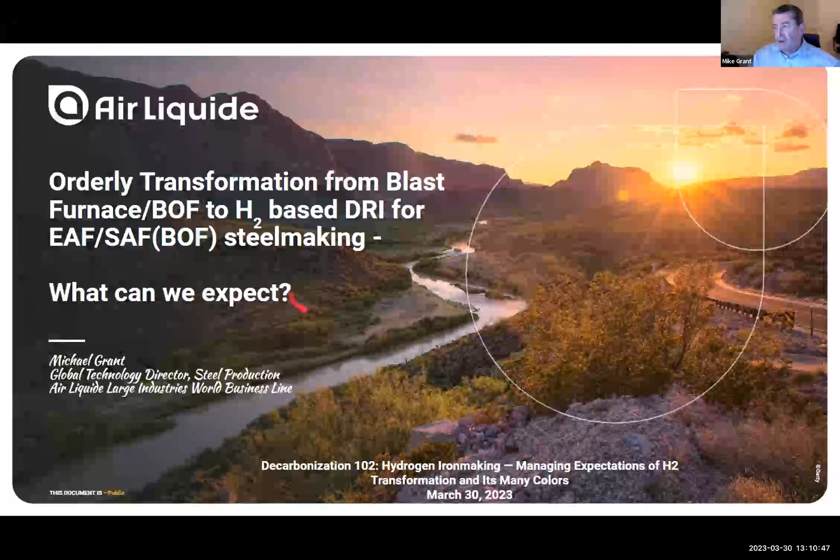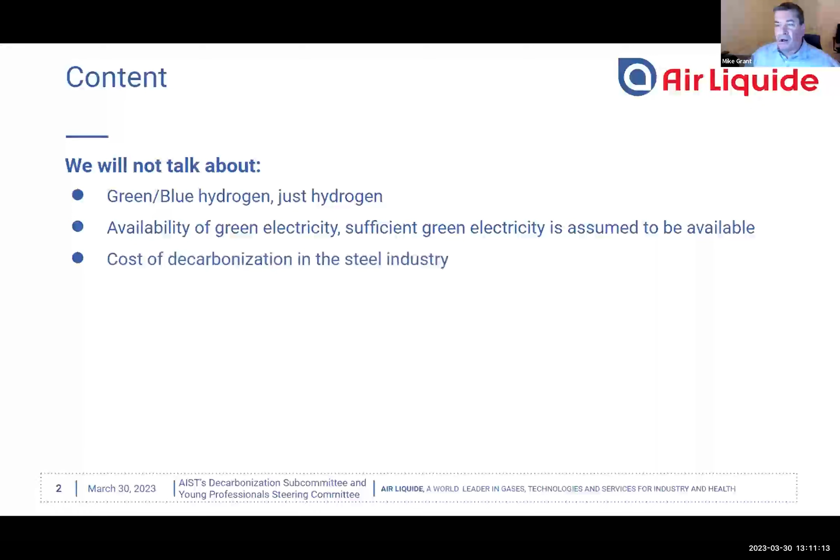Good. Okay, so the title today is Orderly Transformation from Blast Furnace BOF to Hydrogen-based DRI with either electric arc furnace or submerged arc furnace and BOF steelmaking. So what can we expect? Well, I'm going to do something a little bit different. I'm not going to talk about green, blue, or gray hydrogen, just hydrogen. Sufficient green electricity is assumed to be available. We're not going to talk about the cost of decarbonization because we all know this is a very significant endeavor that we need to take.

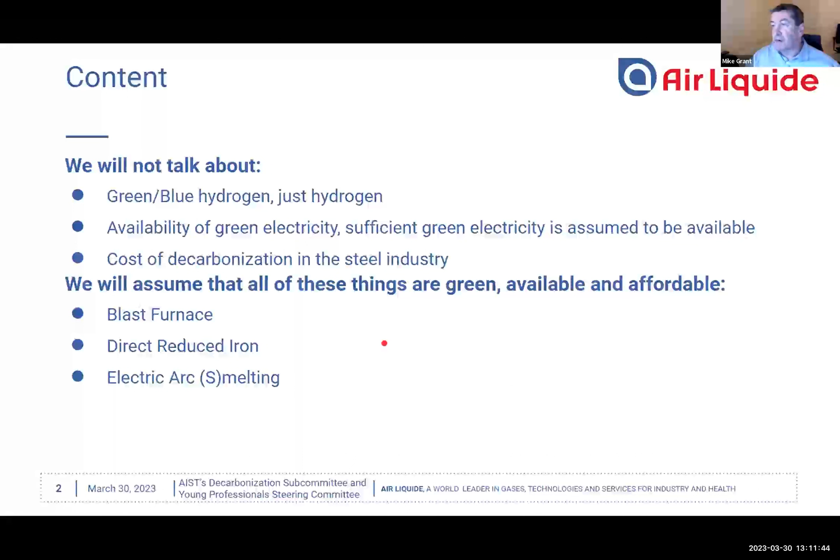Instead, I'm going to assume everything is green, available, affordable, and I'll first talk about the blast furnace, then move on to direct reduced iron, and then finally the use of that direct reduced iron in either electric arc melting or electric arc smelting, as they call it. And this will enable me to focus on other problems besides the ones that I'm avoiding higher up in the list. So let's start with the blast furnace.

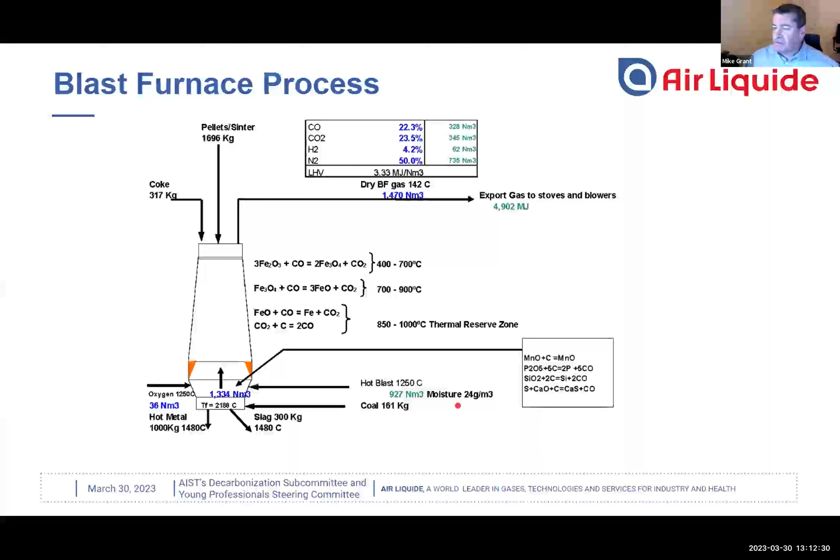This is a classic blast furnace picture. You might find something like this in a textbook. It is very basic. It shows quantities in terms of per ton of iron. And it has the three most important reactions that take place, starting from the charging of the iron ore, Fe2O3, all the way down to the reduction of FeO to iron. I'm not going to say more about this. Those of you who are familiar with the blast furnace have all seen this before. But I'm going to move on to something a little bit more fundamental.

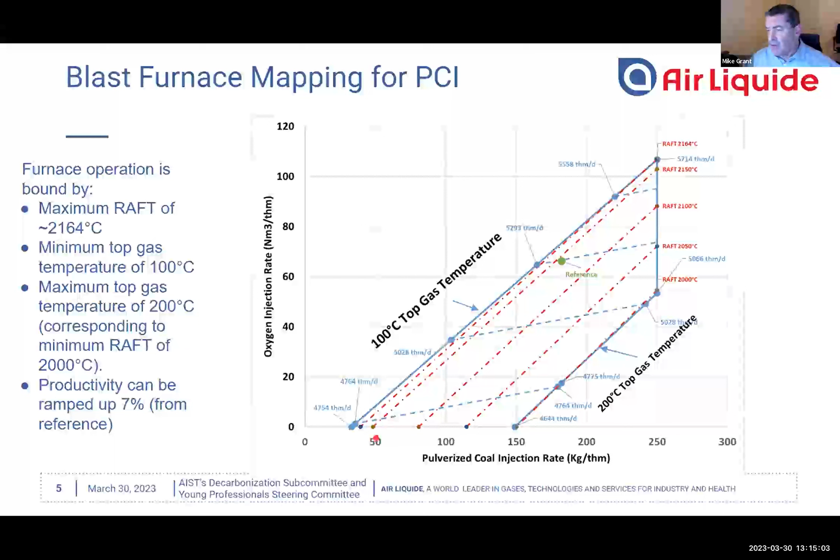We have a minimum top gas temperature limitation, and we have a maximum top gas temperature limitation. These are pretty classic limits that are defined by most operators. This maximum top gas temperature coincides with the minimum flame temperature. So as long as we operate within this range, we can operate the blast furnace fairly smoothly. If we can achieve our maximum coal injection, defined here as 250 kilograms, combining it with oxygen will allow us to increase the productivity up to 7%.

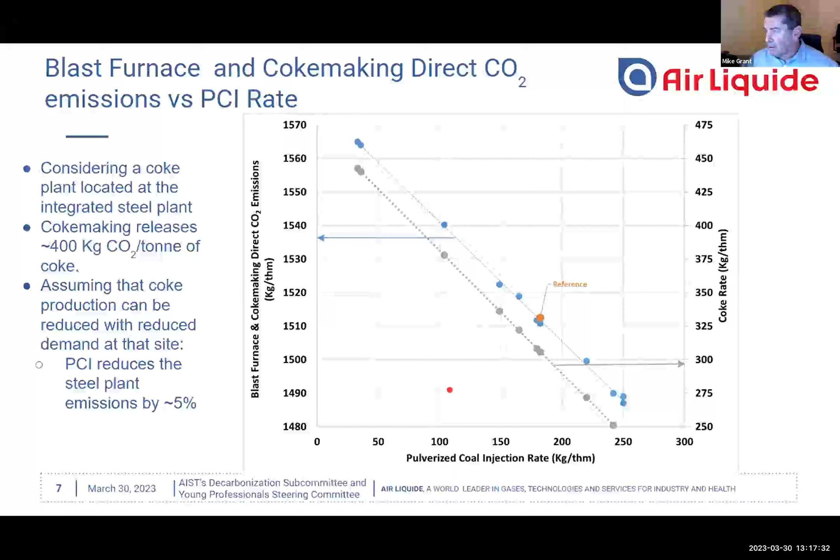So not so much, but nevertheless, it looks a lot better than the previous graph where we showed the CO2 emissions of the blast furnace increasing as we increase coal injection. So overall, we get a net reduction in CO2 emissions. But still, 5% is not very much. And so everybody in the recent years has been talking about hydrogen in the blast furnace. And the reality is we've been injecting hydrogen in the blast furnace for many decades. And this was steam injection, first, I think, documented in the Soviet Union in the 1920s.

And by injecting steam into the tuyeres of the blast furnace, you get a reaction with the hot coke inside the raceway, and this makes hydrogen. And of course, this is very endothermic and requires a coke increase to cover the endothermic energy that is being absorbed. But the hydrogen that was created was found to actually smooth out the operation. So a furnace that's moving or descending erratically, a little bit of hydrogen actually helps smooth it out.

And the reason for this is because the hydrogen is a small molecule. It tends to diffuse more rapidly into the iron ore particles, therefore improving the reduction. And this can decrease the amount of FeO in the primary slag. FeO will leak out of an iron ore particle, touch the hot coke, get reduced, and freeze. And this has a detrimental effect on the permeability and can cause problems with burden descent. So the hydrogen helps relieve that.

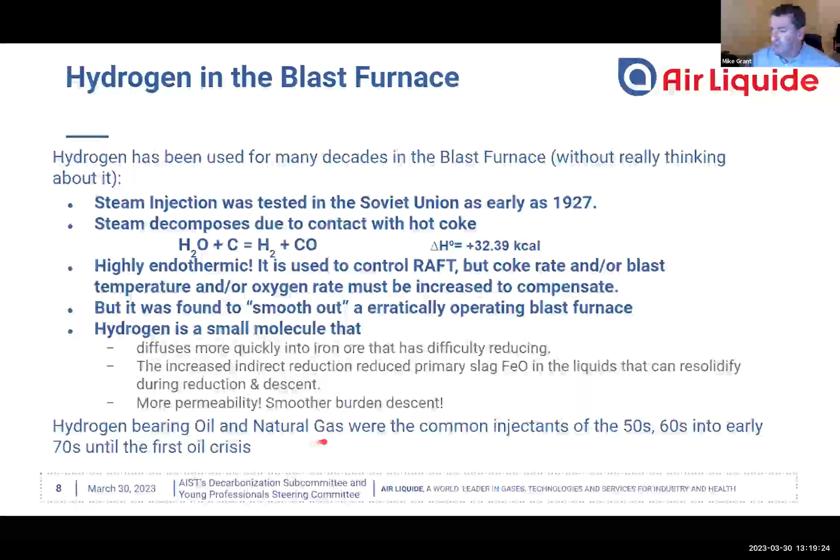Later on in the 50s and 60s, oil and gas were being injected into the blast furnace, and these have a lot of hydrogen in them themselves. And this helped also improve the operation of the blast furnace. Hydrogen has other benefits such as aerodynamic benefits. It can improve the permeability of the furnace. Another limitation is the pressure drop from the tuyeres to the top of the furnace. This is dependent on a permeability represented by the constant K and the density of the gases inside the furnace. We call them bosh gases.

As we put a lot of hydrogen into those bosh gases, this density goes down, which actually lowers the delta P between the tuyeres and the top of the furnace. And so this has, in some cases, allowed for a little bit higher productivity. And so not only do we see the CO2 emissions going down with hydrogen injection, but we also can experience some smoother operation. So what does hydrogen do in the blast furnace?

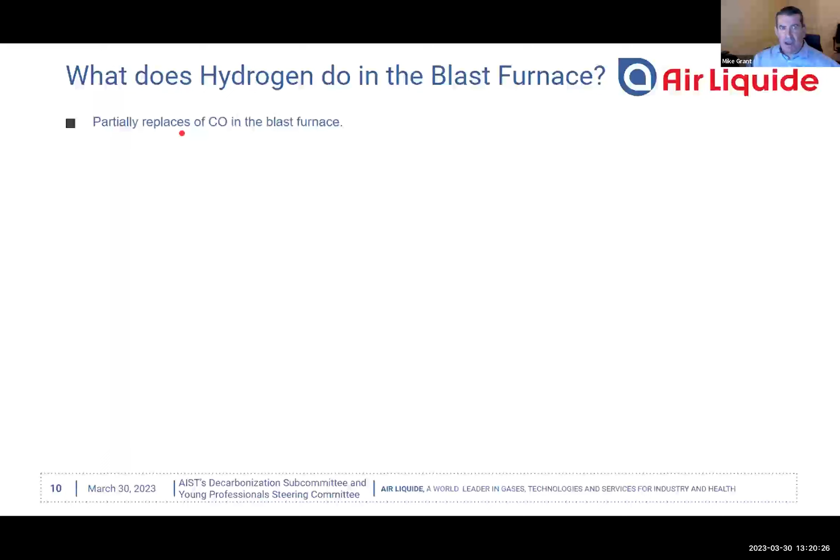Well, you saw in that first diagram I showed you, they had the reduction reactions with CO. Well, hydrogen directly replaces the CO in the reduction. And you can see the three main reduction steps being undertaken with hydrogen. And you'll see that these are the energies required for this hydrogen reduction. Now you notice here that there's a net endothermic effect when we do all of our indirect reduction with hydrogen.

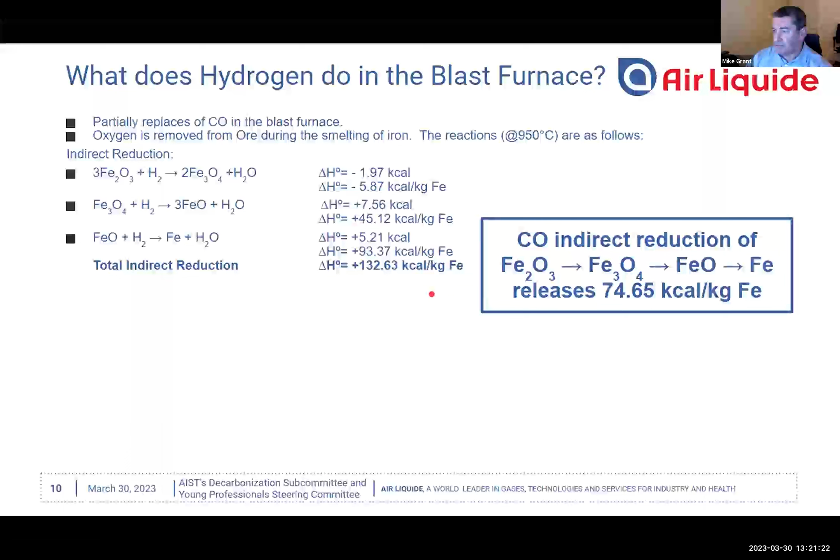If we compare that to CO indirect reduction, CO indirect reduction is actually exothermic, so it contributes energy to the process and therefore helps reduce the total energy requirement of the furnace. Looking at the lower part of the furnace, we start to react water with coke. This is highly endothermic, and the total direct reduction is a very endothermic process. So the net effect of hydrogen reduction in a blast furnace is equivalent to roughly 90 kilograms of extra carbon that needs to be charged to cover the endothermic nature of these reactions.

So this is one of the issues that needs to be dealt with when we use hydrogen in any iron reduction process. If we look at the map of 100% hydrogen injection versus oxygen consumption, we see our limitations get squeezed very quickly. So we're limited by low top temperature and low flame temperature. And as we inject more and more hydrogen, we have to inject a lot more oxygen until we reach this point where we're at our minimum flame and top temperature. And this is our limitation, which is only about 27 kilograms of hydrogen for this particular furnace.

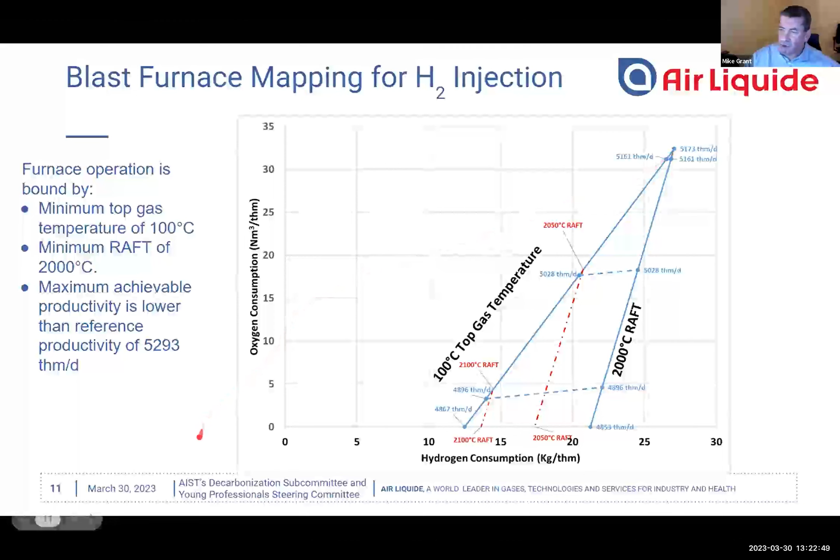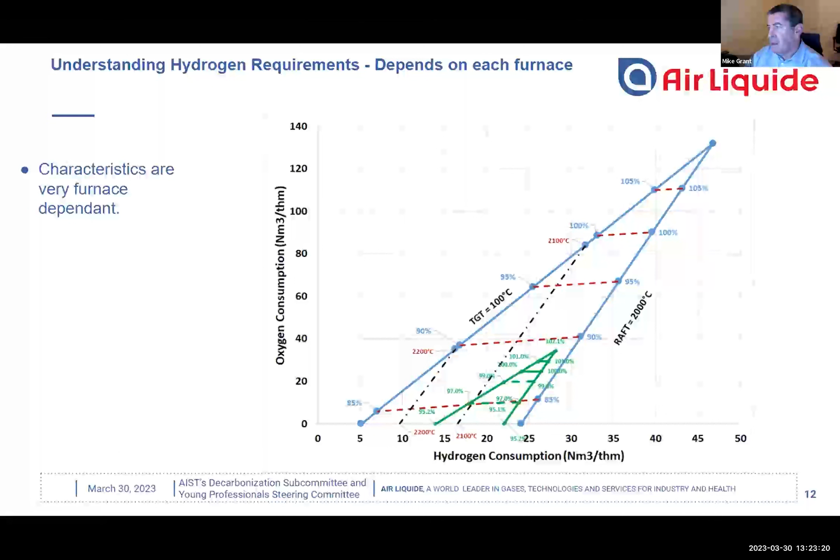So these are the limitations of the furnace. And in fact, in this case, we don't even reach our reference productivity. This effect, of course, is furnace dependent. So this little green map here was the same as the one I just showed you. And a larger one is for calculations I did for another furnace. And this particular furnace can actually accept up to 47 normal cubic meters of hydrogen, which is quite unusual, but it's very furnace dependent. And in this case, this particular furnace would be able to get more benefit out of the hydrogen injection.

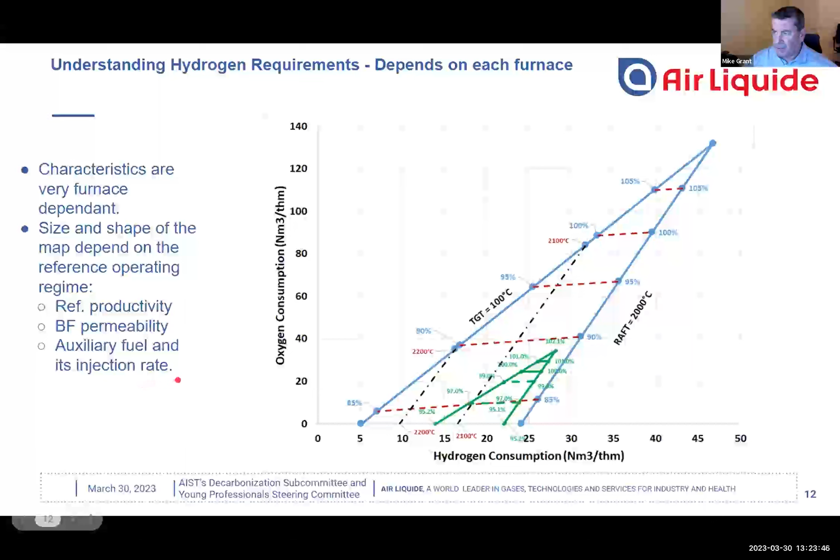It's dependent on many different things. The reference productivity, of course, is very important. If the furnace was already at close to its maximum, the permeability has an effect. And of course, how much auxiliary fuel rate was being injected prior to the hydrogen being introduced. Like the PCI graph, when we inject more hydrogen, we reduce our blast furnace and coke making direct CO2 emissions. Using the same assumptions that the coke plant is located at an integrated steel plant, the same emissions for making coke, and assuming that we can reduce the coke production, we can get a small decrease in CO2 emissions from injecting hydrogen. And this is about 10%.

And it's not very much. The blast furnace emits about 1.5 tons of CO2 per ton of iron that it makes. So if we are able to reduce 10%, that's only about 150 kilograms. And this, of course, is not really going to be acceptable for contributing to energy transition. So in Europe, they're moving away from the blast furnace. But first, let me explain other issues. So for example, we can start with 0 kilograms of hydrogen. We can inject, in this case, up to 19 kilograms of hydrogen and reduce our CO2 emissions by about 10%.

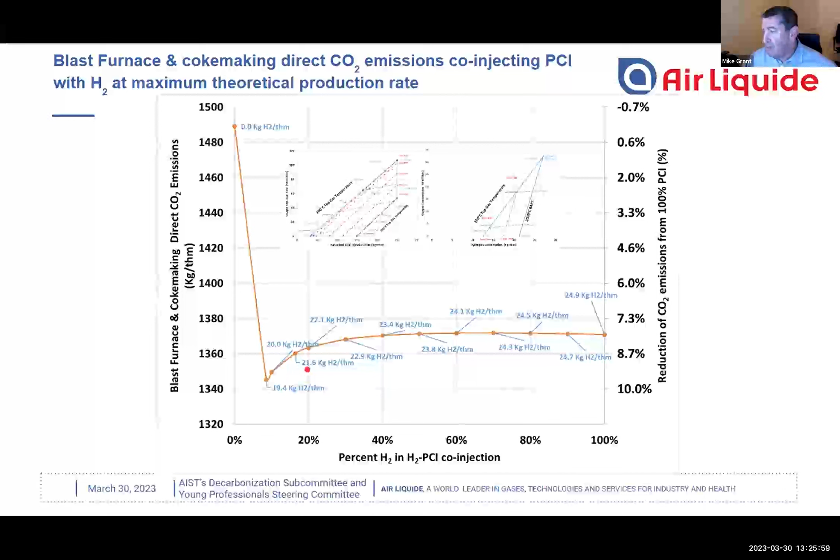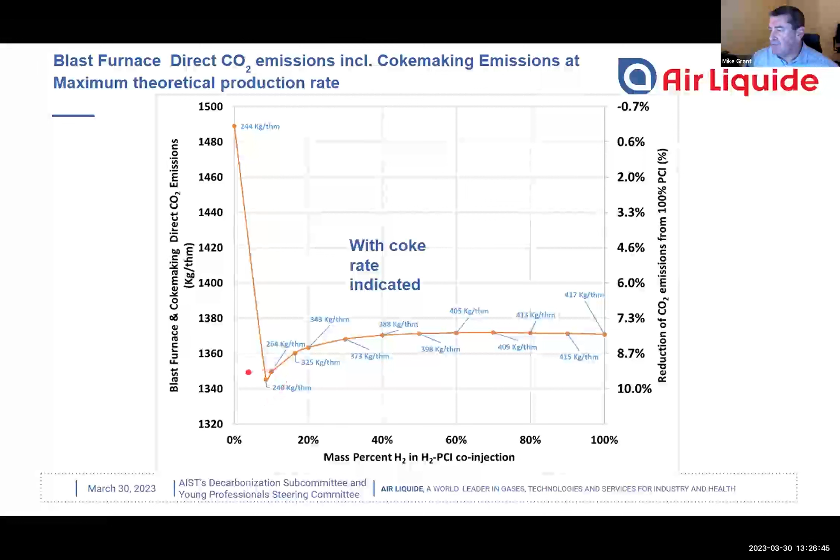Looking at this graph from a coke rate standpoint, you could see, well, the reason we get success in the initial hydrogen injection is because we're able to maintain our coke rate. We're replacing PCI with hydrogen until we get to this point here. And this is very low coke rate. These are theoretical numbers, but it explains the effect. And then at this point, the coke rate needs to be increased again. And when we finally replace all of the PCI, we're back up to about 400 kilograms of coke. And this is why normal operators would stay in this region here, the coke rate inflection point.

However, there is a productivity benefit, and you see if we co-inject PCI with hydrogen, we can actually increase the productivity of the blast furnace beyond the limitations of the original operation with PCI. So if this is the maximum theoretical production rate with PCI, and we mix a little bit of hydrogen in there, we can actually get another 6% increase in productivity on a theoretical basis. The same effect is also true with natural gas, although you need a higher amount of natural gas in order to get this maximum productivity benefit. But nevertheless, there are some benefits to co-injecting hydrogen and/or natural gas with PCI.

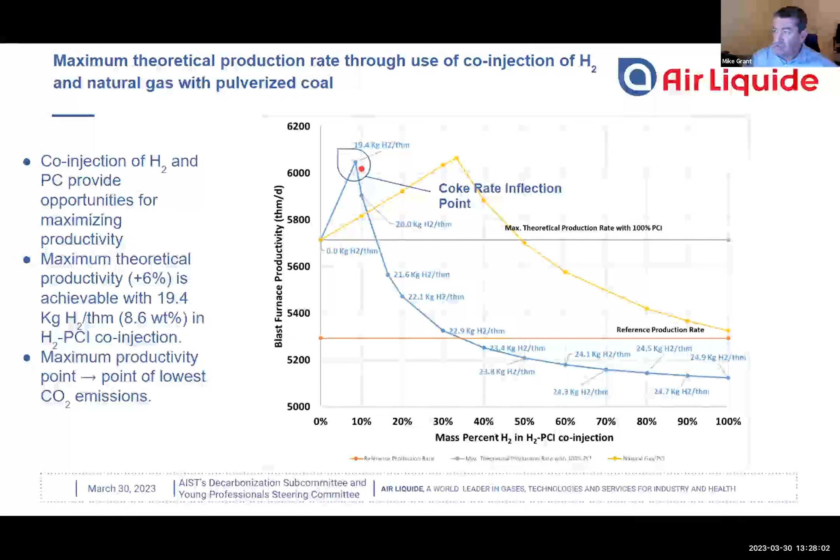This maximum productivity point is also the point of lowest CO2 emissions. So if we can achieve that and get around other limitations, practical limitations that the blast furnace might have, we could actually kill two birds with one stone, reduce our CO2 emissions while increasing the productivity of the blast furnace.

But here in Europe, most of the major steel companies now have announced that they're going to switch to direct reduced iron, because of this limitation that hydrogen has with the blast furnace. 10% is not enough, and so the steel companies are being forced to plan for direct reduced iron making with either submerged arc furnace or electric arc furnace steel making.

And here's an example of some calculations that were done for melting steel to make steel in the electric arc furnace. The reference, of course, is 100% scrap. And you can see this is not a model furnace. It's a rather unimpressive performance, but 480 kilowatt hours per ton is not so uncommon, and 22 normal cubic meters of oxygen.

If we replace 75% of that scrap with DRI and a high carbon DRI, which is desirable, we can maintain our chemical energy by adding a little bit more oxygen, but our power consumption goes up, and it goes up considerably by about 70 kilowatt hours per ton. And this reduces the productivity of the furnace by about 11%. And so this is one of the drawbacks of DRI, but you'll be reducing your CO2 emissions.

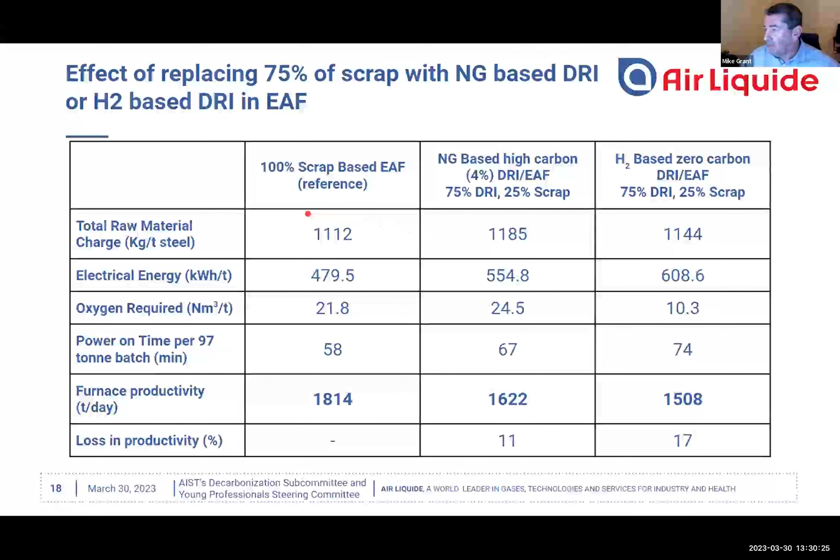If we go further and replace the natural gas reductant with 100% hydrogen, now we're making a DRI that has no carbon in it anymore. And so it's going to be more difficult to melt it in the electric arc furnace. We'll have to back off on our oxygen in order to maintain our yield. And we see this chemical energy is no longer available, so we have to melt with more electrical energy, and we lose another 6% or 7% productivity. So this is one of the issues we're going to have to deal with when we start using electric arc furnaces to melt DRI.

Now, there's two processes or two routes being anticipated here in Europe. One of them is the high carbon DRI being charged into a submerged arc furnace, which is producing a high carbon hot metal. And this high carbon hot metal will be further refined in the BOF, just like they were doing in the first place. To get the carbon in the DRI, of course, you need natural gas. This natural gas deposits carbon in DRI, and you need at least 3.5 weight percent carbon in the hot metal in order to be able to use it in the BOF.

And why do they want to do this? Well, one of the issues with producing low nitrogen steels is we rely on the CO bubbling to purge the nitrogen from the steel. And this is one of the important reasons why it's hoped that the BOF can be kept. The other thing, of course, there's a shortage of DRI grade pellets, which are very high iron content pellets. And this method would enable you to use blast furnace iron ore pellets, which have a higher slag volume. And because the submerged arc furnace is a reducing environment, we don't have the problem with FeO in the slag. And the higher the slag volume, the more FeO you lose, so your yield goes down.

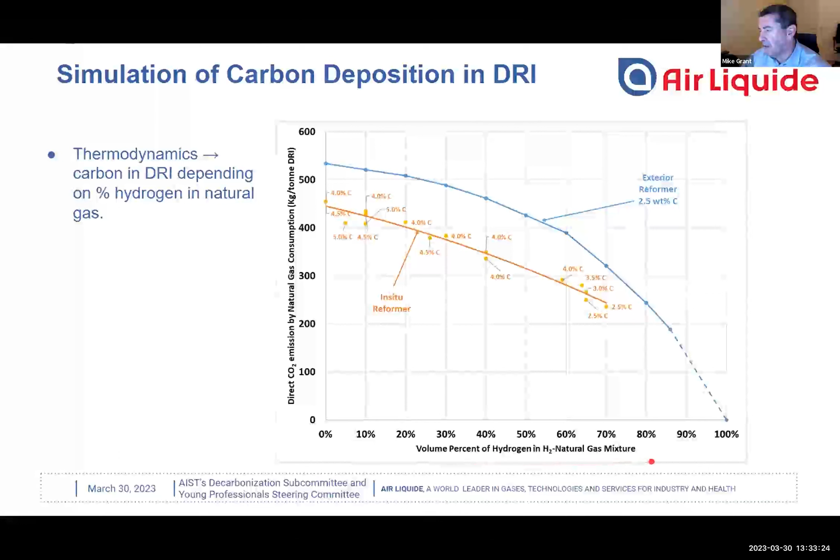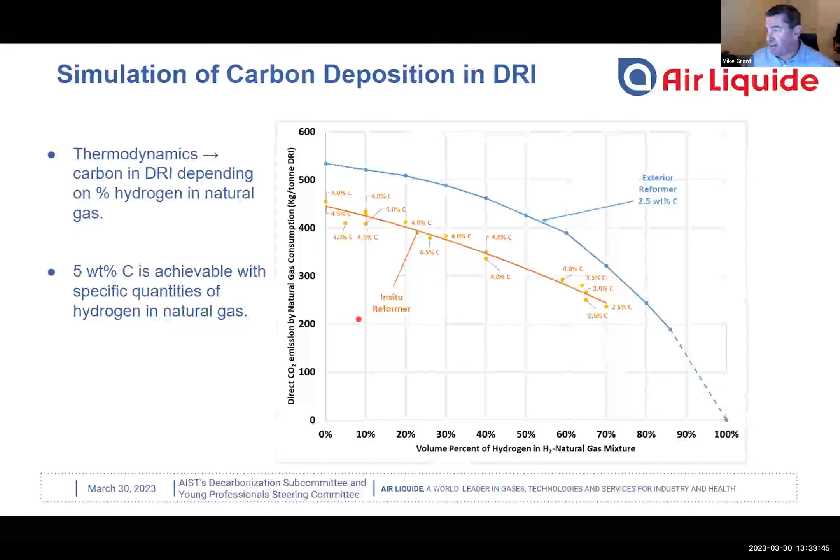Now, I did a little thermodynamic simulation of carbon deposition in the pellets during DRI making. And you can see that we can put carbon in the DRI even if we start adding hydrogen in the mixture with the natural gas. And theoretically, at least, and it's been published also, you can get up to 5% carbon in the DRI, which is good. That's chemical energy we can use in the steelmaking process. And so this is quite achievable, thermodynamically at least, and evidently practically. And so we can make a hot metal if we want to.

However, I went back too fast. However, with DRI, it's impractical to reduce all of the iron units to metallic iron. Typical merchant DRI is about 94% metallization, which means 94% of the iron content in the DRI is metallized. This means about 7.6 or 8% FeO is in the DRI.

And so when we produce a high carbon DRI and we melt that high carbon DRI, this FeO is going to attack the carbon first and use up quite a bit of the carbon. So if we manage to produce a 5% carbon DRI pellet and we melt that pellet, we're only going to produce somewhere around 3.5 to 3.7% carbon in the hot metal, which doesn't give us a lot of room for use in the BOF.

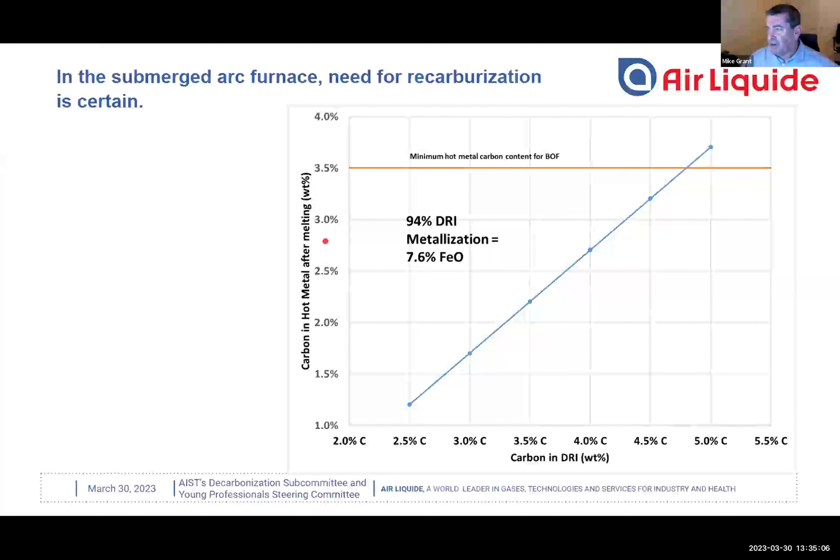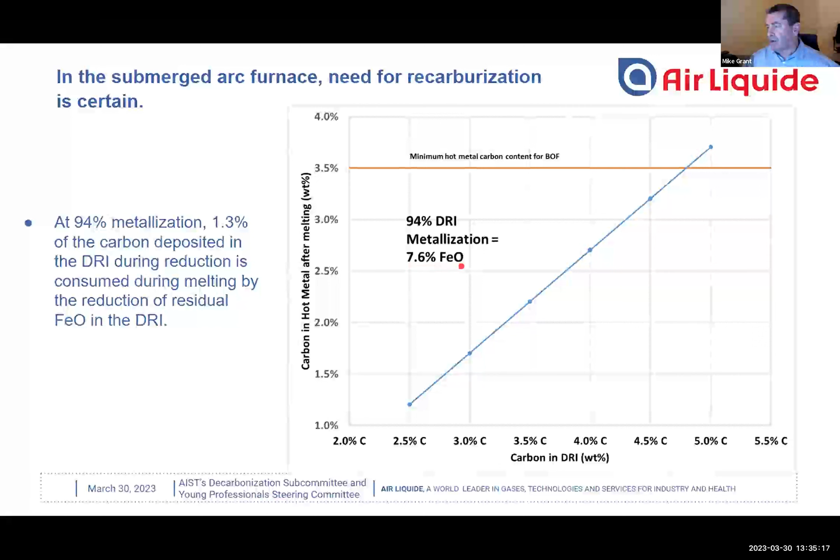So evidently, whether it's a high carbon DRI or a low carbon DRI, we're going to need to get carbon into the process. We're going to lose about 1.3% of the carbon that was deposited in the DRI just through reduction of the residual FeO that's there. What does this mean if we're using it in a BOF?

Well, let's compare with classic hot metal with 4.5% carbon, 0.6% silicon. And let's say we can melt 25% scrap and 75% hot metal. Pretty good ratio. Sometimes we can go down to 70% hot metal. It depends on the silicon content in the hot metal.

Now, when we melt DRI in a submerged arc furnace, we're going to see very little silicon, experts tell me. This silicon is chemical energy from the oxidation reaction. Just from this loss of silicon, it's going to limit how much scrap we can use. In fact, we'll have to go from 25% scrap down to 13% scrap. And this problem gets worse as the carbon content in the hot metal decreases.

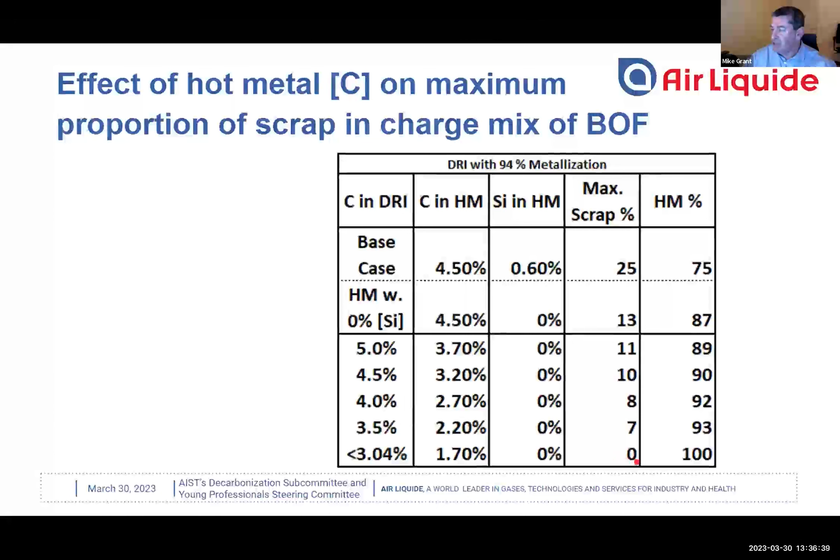So 4.5% carbon in the DRI gives us only 3.2% carbon in the hot metal. Without silicon, this brings our scrap ratio down to 10%. And finally, at 3% carbon in the DRI, we will not have enough chemical energy remaining to melt any scrap. And increasing the scrap ratio is one of the key strategies for reducing CO2 emissions. So we've got a problem here, and of course it all boils down to how we get this carbon in the hot metal.

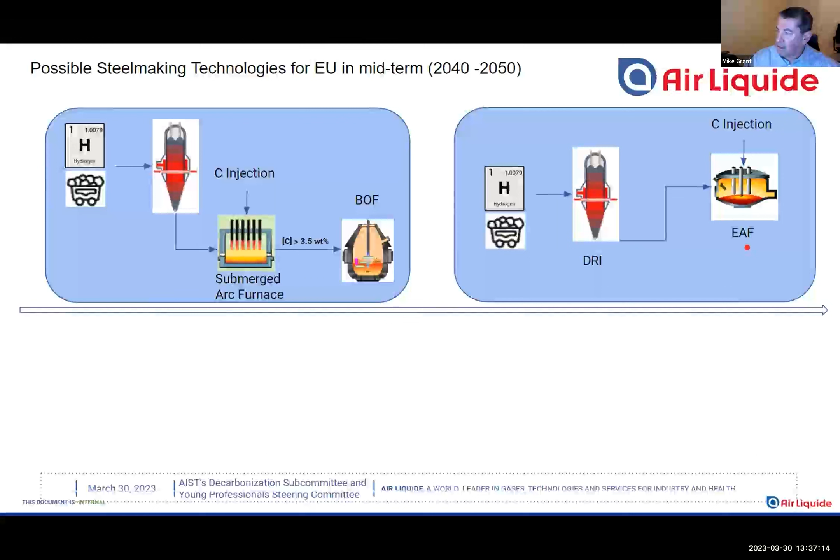So in the future, of course, we want to change this to hydrogen. This is going to produce a DRI with little or no carbon. We'll need carbon injection in both the submerged arc furnace and the electric arc furnace. And so the reducing environment, of course, will require carbon injection. We need to put that directly in the metal, which means it's got to go through the slag and dissolve quickly in the hot metal. So we want the carbon in the hot metal.

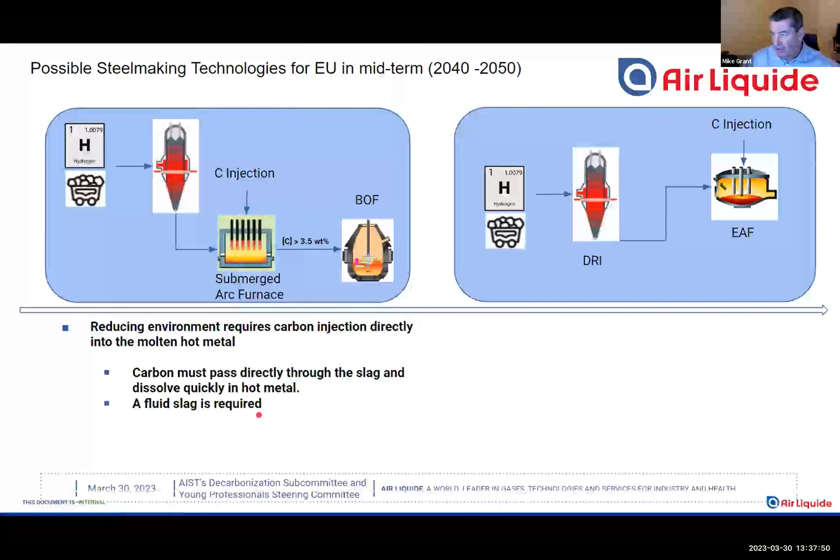This means we need a fluid slag. If we have a blast furnace type slag, this shouldn't be a problem. Blast furnace type slags are designed to be rather fluid, so you can get it out of the tap hole. And so we need to be able to inject the carbon through the slag and into the hot metal. Efficient carbon injection is going to be, in my opinion, one of the key technologies. It sounds simple, but it's going to be one of the key technologies that makes this concept work well.

If we look at the classical electric arc furnace process, traditional carbon injection is used to control the FeO content in the slag, because we're in an oxidizing environment. We're oxidizing quite a bit of our iron units. It's making FeO, which is going into the slag. We've got to recuperate some of that FeO. We do that with carbon injection.

And if we treat the slag correctly, we get slag foaming too, which is a thermal benefit. It reduces yield loss and prevents over-oxidation, so we don't damage our refractories with excessive FeO in the slag. However, conventional carbon injection systems in today's EAFs are around 50% efficient, which means you lose about half of it into the fourth hole, into the exhaust system, where it travels down into the dropout box and smolders and makes CO2 with no benefit whatsoever.

So just a few things to think about. I'm just giving you my final remarks. For the blast furnace, hydrogen injection has limited benefits, unfortunately. The blast furnace itself is such an efficient process. It won't benefit much from hydrogen injection when we're looking at CO2 reduction. About 10% is what we can expect if we're counting the emissions from coke making. And this is the reason why in Europe, almost all the major steel companies are looking to retire their blast furnaces when it's economical to do so.

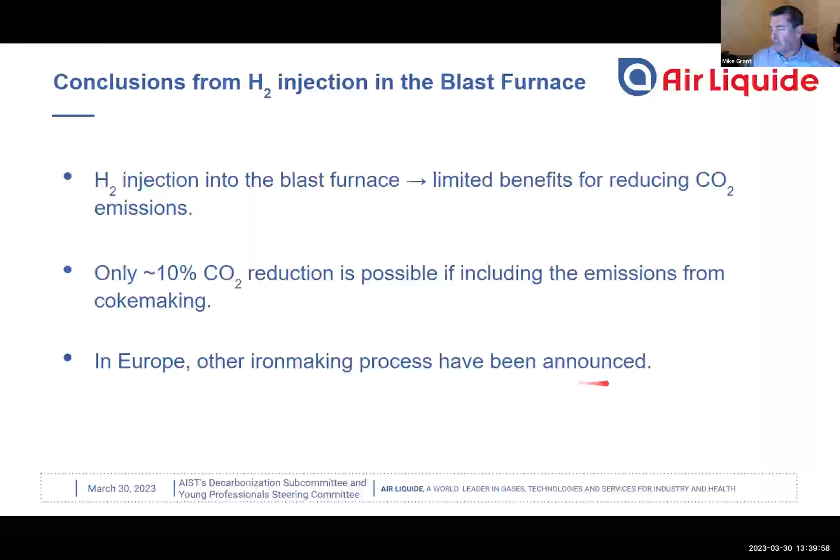Looking at steelmaking, the injection of carbon into the metal bath is going to be critical. We need to do it much more efficiently than we do today. We need to be able to produce a hot metal suitable for the BOF. And this can only be done with carbon injection. And the traditional EAF needs also to be able to use low carbon DRI. And so carbon needs to be efficiently added. We have to compensate for little or no silicon dissolved in the hot metal if we're using a submerged arc furnace. And again, carbon efficiency is going to be the key to saving or making this much better.

So I think this is the challenge for the future. It sounds like a small thing, but it's actually going to be, I think, one of the key developments that enables all of these steelmaking routes to be successful in a low carbon world.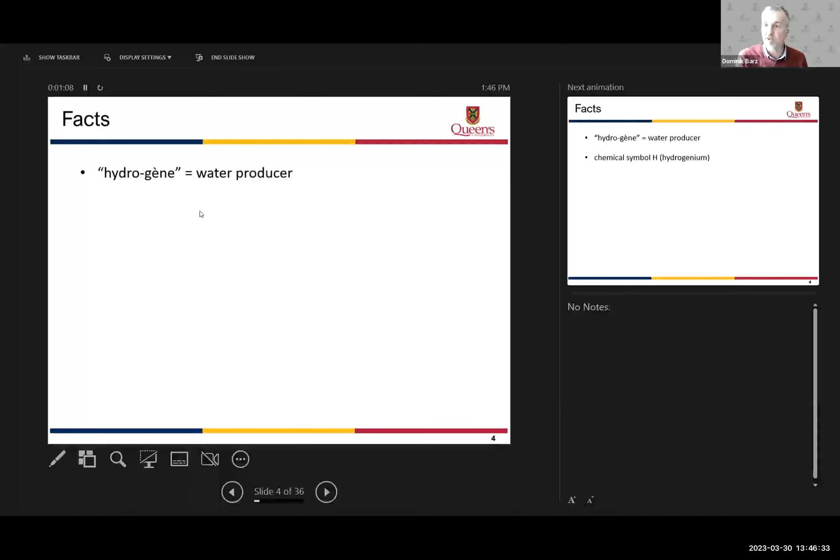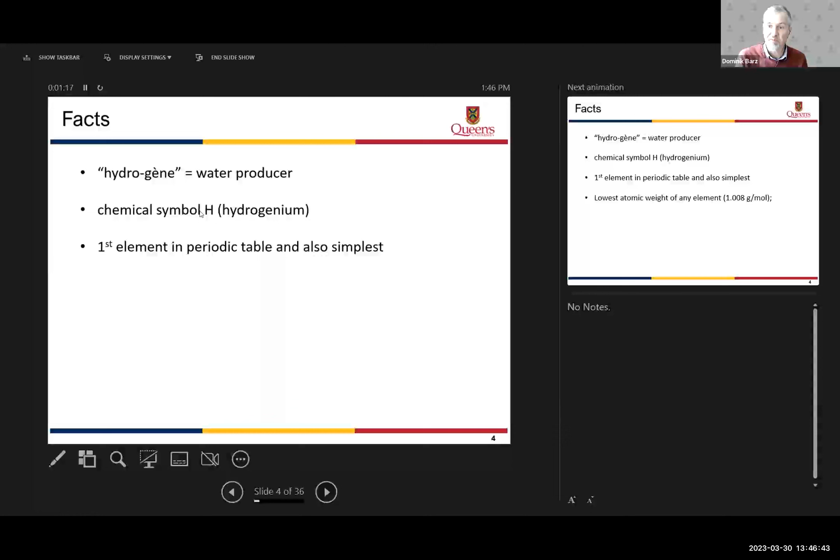Hydrogen comes from hydrogène, which is French for a water producer, because water is made out of hydrogen. Chemical symbol is H, hydrogenium. It's the first element in the periodic table because it's also the simplest one and the lightest. So it has the lowest atomic weight. It's around 1 gram per mole, which is the molar mass.

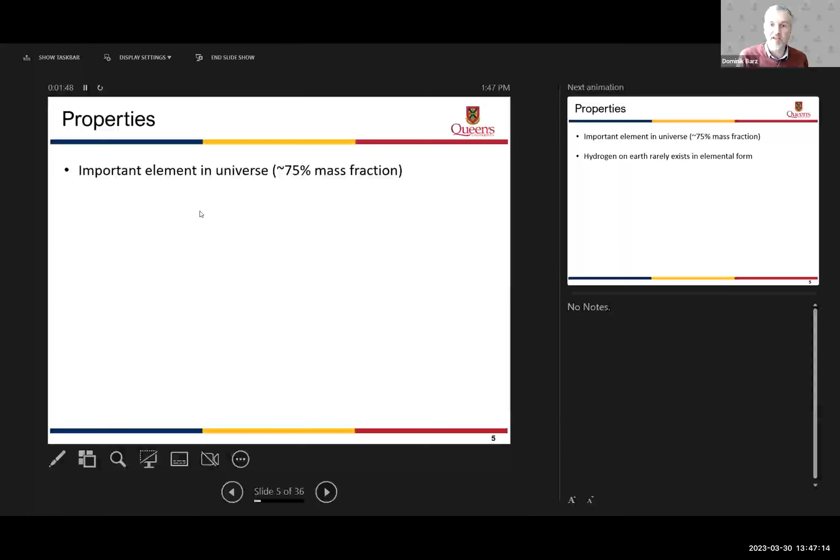It consists of a charged nucleus, which we usually call a proton, and a negatively charged electron. And we have it in forms of isotopes, and then it contains small neutrons. It's the most important element in the universe, and it's estimated that 75% of the universe consists of hydrogen in one form or another. But hydrogen on Earth we rarely find in the elemental form. We always find it as a compound of another molecule. So on Earth, the largest proportion comes in the form of water.

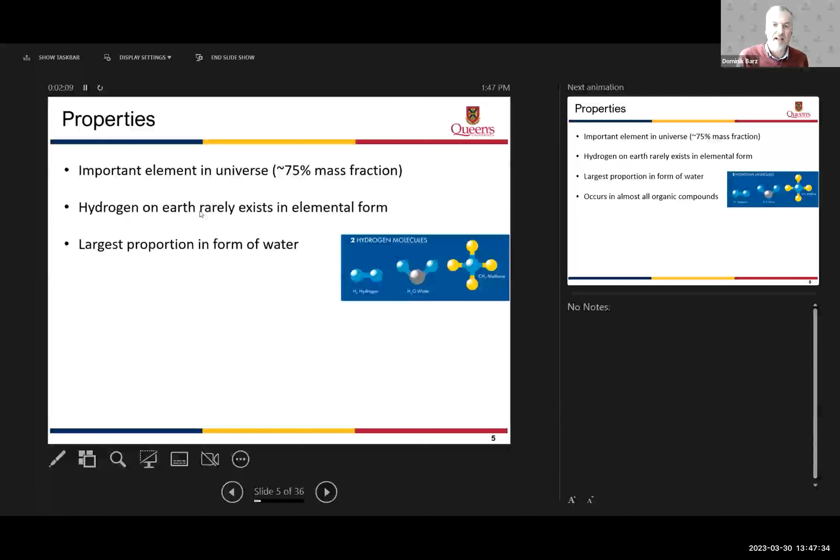And almost all organic compounds also have hydrogen. And fossil fuels, so hydrocarbons, are primarily made of hydrogen. And the higher the hydrogen to C ratio of hydrocarbons, the lower its greenhouse gas emissions during combustion. That's what we are interested in.

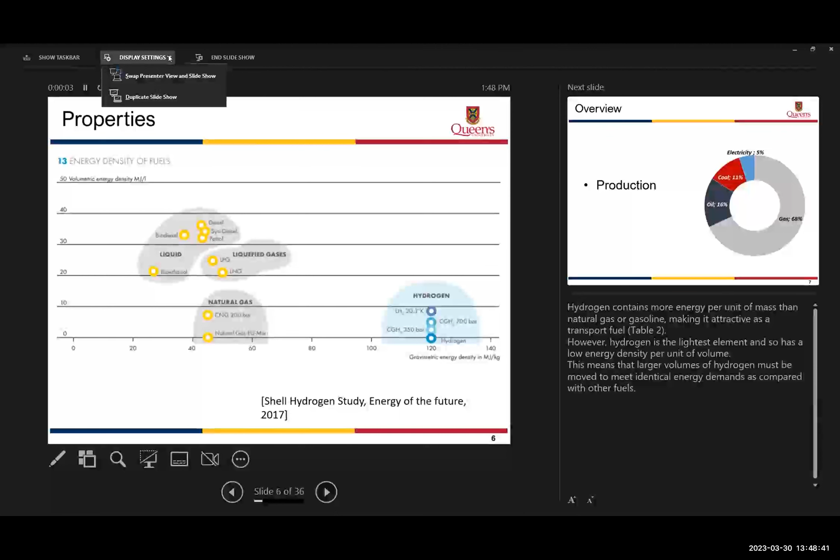Apologies, Dr. Barz, for interrupting. Would you please ensure you're showing the presentation view? We see your next slide in notes as well. Oh, thank you very much. No one told me. So how about now? Wonderful, thank you. I'm sorry for that. No, hang on. I have to change it once more because now my notes are gone. So what do you see now? We see your notes still. Okay, hang on. How about now? Perfect. Excellent. Good. Made it. Thanks, and sorry for that. All good. Thank you.

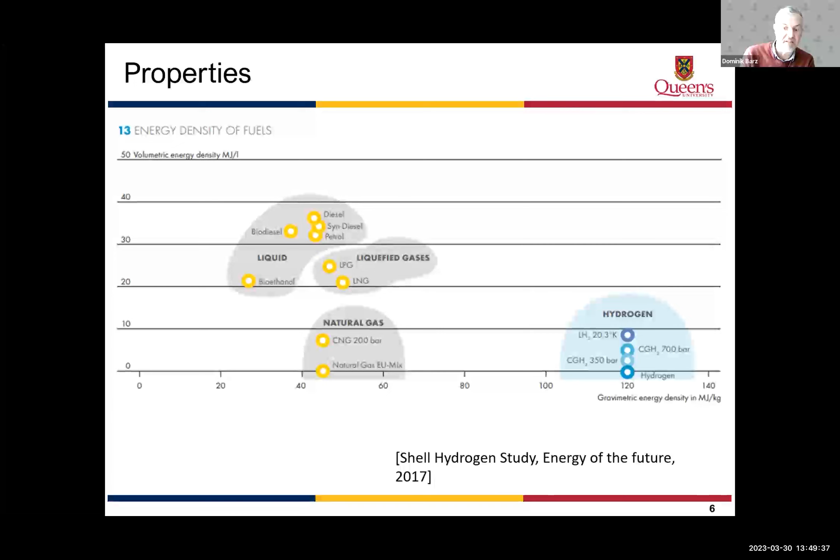Okay, so if we take a look at hydrogen as a fuel and compare it to other fuels, we see that it's a really good fuel because it contains more energy per unit of mass than natural gas or gasoline. And that makes it really attractive as a transport fuel. But on the flip side, hydrogen is the lightest element, and therefore to store that unit mass we need a very high unit volume. So this makes it very difficult as a fuel for our energy demands compared to other fuels.

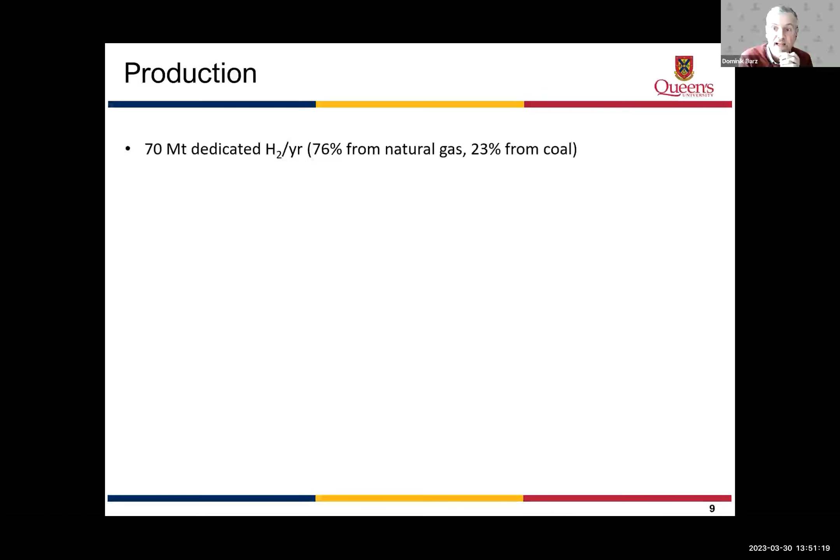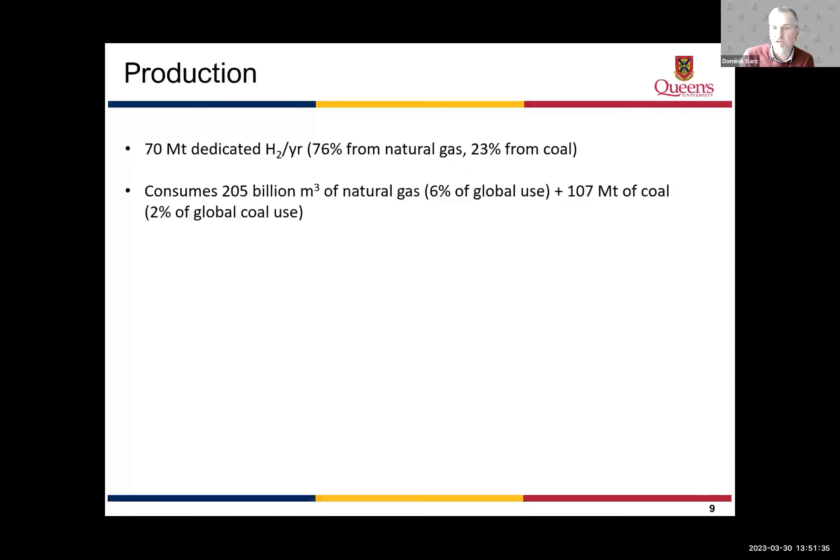So some general facts are that 70 megatons of hydrogen are produced per year, and this is only the dedicated hydrogen. There's much more hydrogen produced, but usually as a side product, for example in oil refinery processes. From that 70 megatons, 76% comes from natural gas and 23% comes from coal. This consumes around 205 billion cubic meters of natural gas, which is around 6% of the global use. It also consumes 107 megatons of coal, which is around 2% of the global coal use.

It's responsible for 830 megatons of carbon dioxide emissions per year, which is the annual carbon dioxide emissions of Indonesia and the UK together. Electrolysis is only responsible for about 2% of the global hydrogen production right now. If we would like to change that, so that all hydrogen is produced by electrolysis, we would need 3,600 terawatt hours per year, which is more than the European Union's annual electricity generation.

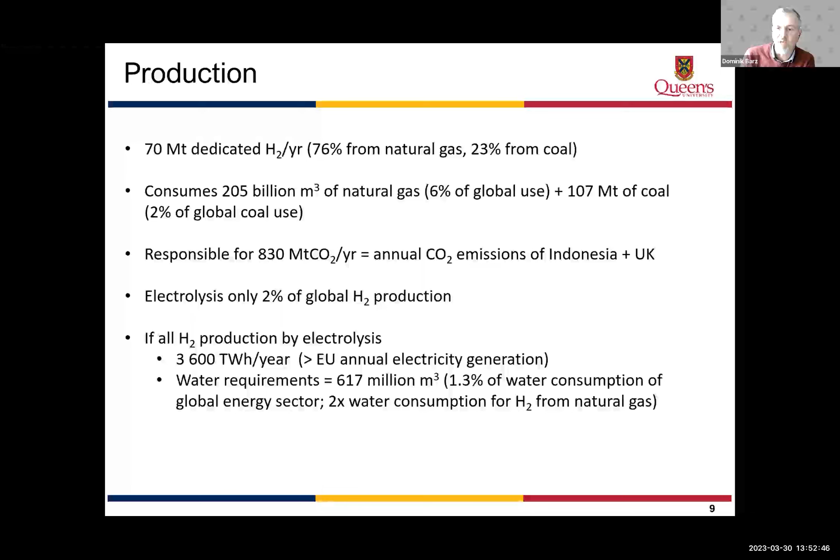The water requirements are fairly high as well. We would need more than 600 million cubic meters of water, which is around 1% of the water consumption of the global energy sector. It's 2 times the water consumption that we require to make hydrogen from natural gas. Just to put that a little bit into perspective, what happens when we make everything with electrolysis.

So depending on how we make hydrogen, it became a kind of a fashion to assign a color to it. And the color indicates kind of the greenhouse gas footprint. And in the following slides, I will show you a little bit what it means to have green hydrogen or pink hydrogen or blue hydrogen.

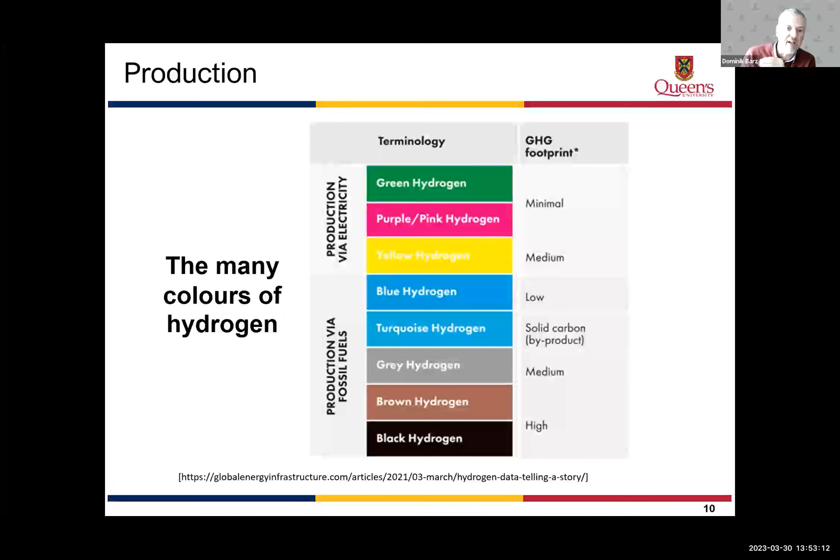But before that, I would like to talk about water electrolysis, because for green and pink hydrogen, this is the technology that we use. So water electrolysis is that we use electricity to create hydrogen and oxygen, whereas the oxygen is rather a side product because it has not a very high value.

To do that, if I have 1 mole of water, I need electricity around 240 kilojoules per mole. And I also need heat around 50 kilojoules per mole of water. And then I would get a mole of hydrogen and half a mole of oxygen.

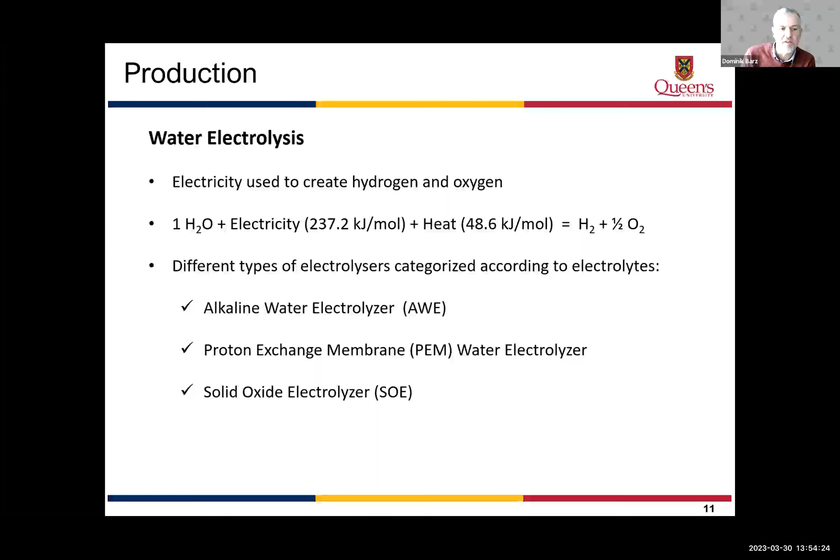There are different types of electrolyzers, which can be categorized according to electrolytes. So we have the alkaline water electrolyzer, we have the proton exchange membrane water electrolyzer, and then we have a new technology which is coming into the market, which is called solid oxide electrolyzer. Because of the time, I just talk briefly about the proton exchange membrane water electrolyzer, because this is probably the most advanced technology nowadays. Maybe not the most installed technology, but the most advanced technology.

So what we have here is 2 electrodes and a membrane, and the membrane is acidic and it keeps the electrolyte, and the electrolyte is acidic as well. So it means it has a lot of protons, H+. And then we have 2 electrodes, and at the one electrode, it's called cathode, we have a reduction. So the protons take up electrons and will make the hydrogen.

And at the other electrode, at the same time, we have water, which is split or oxidized into protons, half mole oxygen that we gain, and electrons. So this is how the PEM water electrolysis works on a very generic or general level.

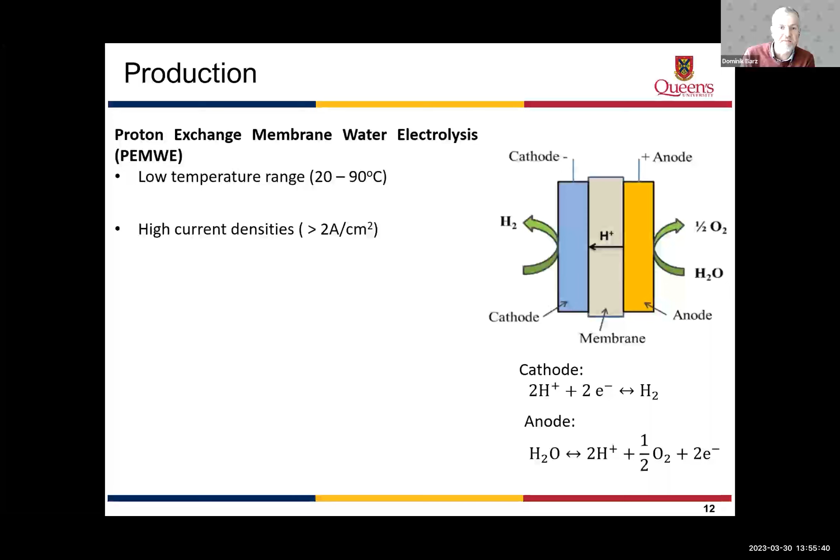The advantage of this technology is that it has a very low temperature range, just 20 to 90 degrees Celsius. We can achieve very high current densities, more than 2 amps per square centimeter. That's very high. It also has a compact system design and very good dynamics. It delivers a high purity of gases, and the energy efficiency is also good.

So energy efficiency means how much energy do we lose for making the hydrogen, or is related to the losses. So the higher the energy efficiency, the less energy we spend on making the hydrogen.

The disadvantage of the technology is that the cathode, the one electrode, is made from platinum and palladium, which is already expensive, but the anode beats that. It's made from iridium oxide and ruthenium oxide. And as far as I know, the annual world production of iridium for iridium oxide is around 5-6 tons per year, which is nothing. And this is one of the major problems that this technology has.

Also, the durability is limited because of the very harsh conditions. So we have very low pH values. It's very acidic. Anyway, so electrolysis is the main technology that is used for different hydrogen production processes where we assign different colors to.

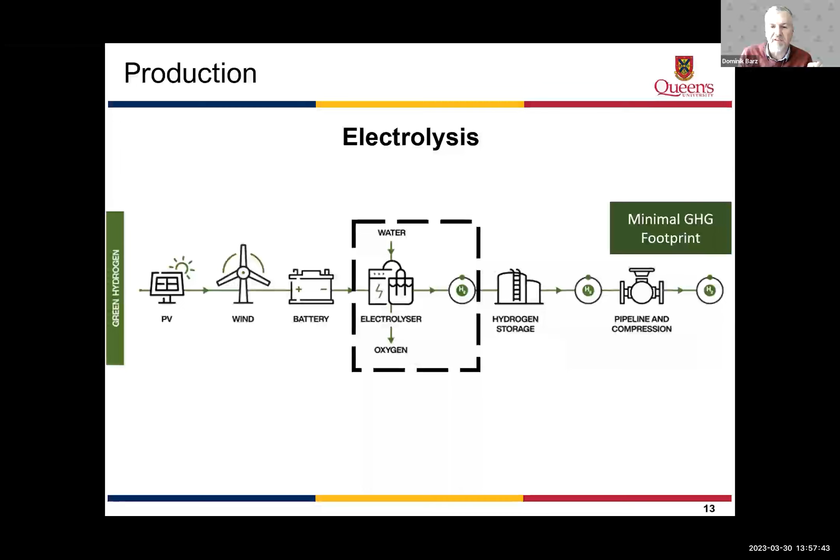So we have the electrolyzer that we feed with water. So the electrolyzer needs electricity, and if the electricity comes from renewable energy like photovoltaic or wind, then we call that green hydrogen. And this has minimal greenhouse gas footprint. Let's say, and that's very simple thinking. It's only if the entire process chain is made also with renewable energy and not maybe with an energy mix which has a high carbon dioxide emission.

Anyway, of course, we can also use nuclear energy. For example, I live in Ontario, and we have a very high fraction of nuclear energy in our electricity mix. And then we call that pink hydrogen, and it also has a minimal greenhouse gas footprint.

And then usually in other countries, for example, Germany, you have a mixture of different energy sources. So you have renewables, you have carbon-based technologies like coal power plants, and you have nuclear and hydro. And when you have that, you call the hydrogen that you make yellow hydrogen, and the greenhouse gas footprint is considered medium. So these are the different electrolysis production methods that we can have.

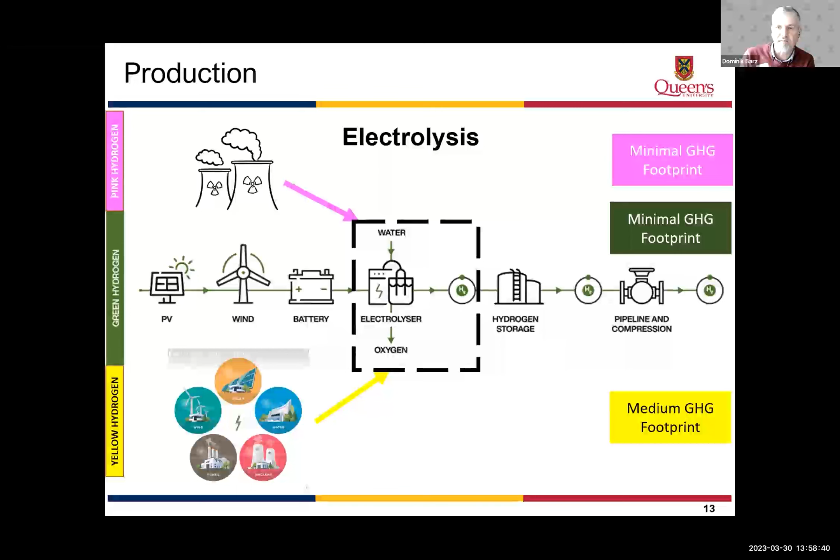Of course, we can make hydrogen with a conventional chemical process. And one of these processes is steam methane reforming. So we have natural gas that we usually clean, and then we reform it.

That means we add water to the methane and heat it up. And maybe we have a catalyst, probably we have a catalyst. And what we produce is a syngas consisting of carbon monoxide and hydrogen. And this syngas can further be converted into more hydrogen and carbon dioxide in the so-called water gas shift reaction. And then maybe we can capture the carbon or maybe not.

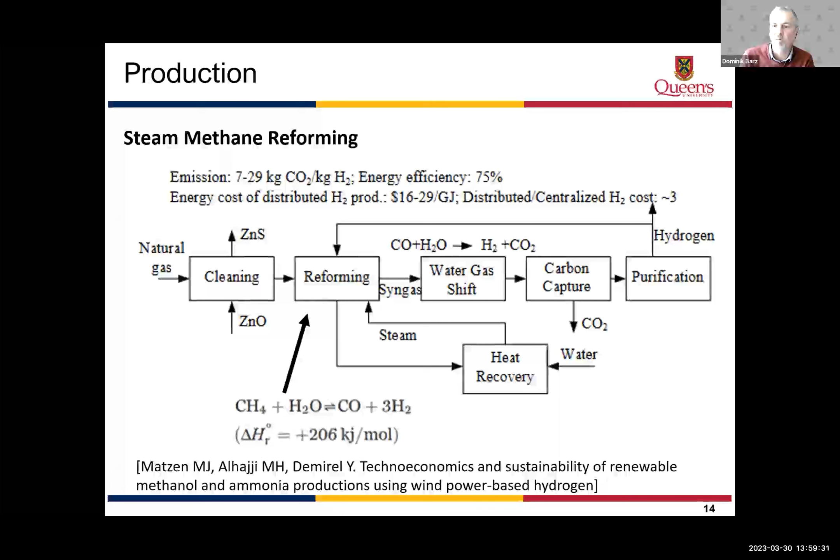So this is an endothermic process. It needs something like 206 kilojoule per mole. But I don't want to go into more details than that. Then we have methane pyrolysis. This is the catalytic decomposition of methane. So methane is split into carbon and hydrogen.

And it's a very good process technically because we don't have or hardly have carbon dioxide emissions, because the carbon comes as a solid product. However, it operates also at higher temperatures, and it's a mildly endothermic process. Just to give some perspective, if we put in 4 tons of methane and 5 megawatt hours of heat, we get 1 ton of hydrogen and 3 tons of carbon as a solid.

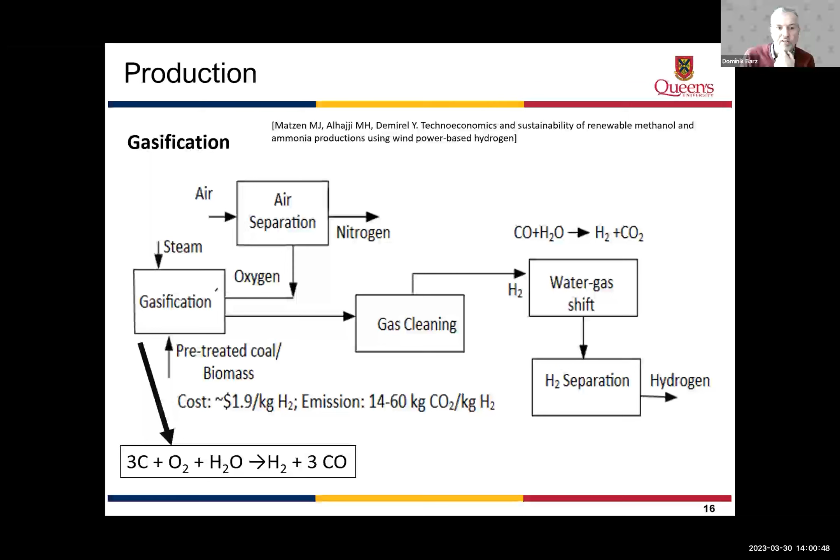Then we have gasification. So we can have carbon from coal, or we can have biomass, and we add oxygen and water here. And again, we make a syngas similar to the methane steam reforming, which can be further converted in the water gas shift reaction to make more hydrogen and carbon dioxide. So these are the main chemical processes that we use in the reactor. And then, depending on the feed and how we process the gas that we get from the reactor, we can assign different colors to the hydrogen.

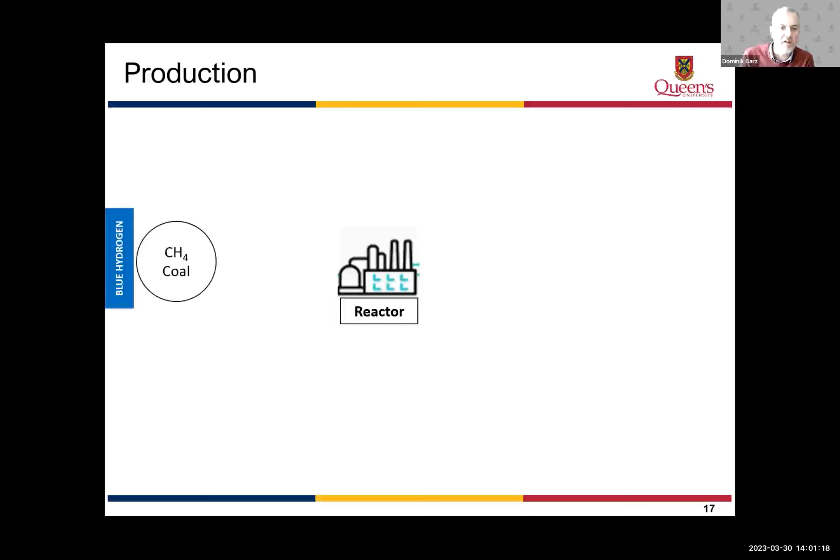So the most conventional thing is blue hydrogen. Here as a feed, we have methane or coal. We feed that in the reactor, and we do it with reforming, steam reforming usually. What we make is hydrogen and carbon dioxide. And now we have the opportunity to capture that carbon dioxide. There are different technologies, physical, chemical. And because we filter out the carbon dioxide from the emissions, we have a low greenhouse gas footprint.

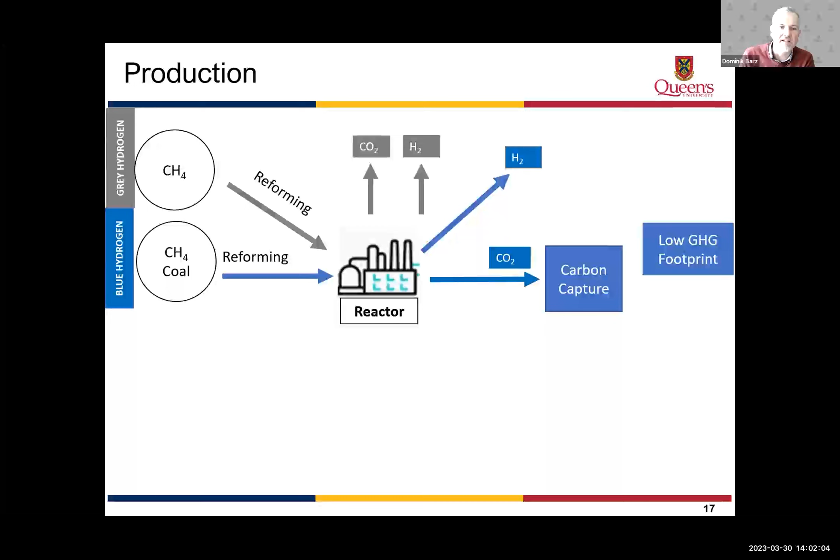Then we have gray hydrogen. That's just having methane. We do the same reforming process. We get again hydrogen and carbon dioxide, but we don't remove the carbon dioxide. That's kind of the standard industry process. And this is gray hydrogen with a medium greenhouse gas footprint.

Then we have turquoise hydrogen. Here we have methane and pyrolysis. Feeding in the reactor, we get the solid carbon and the hydrogen, and it has a low greenhouse gas footprint because, again, we get the carbon as a solid and not in the form of carbon dioxide, and the carbon has no greenhouse gas effect.

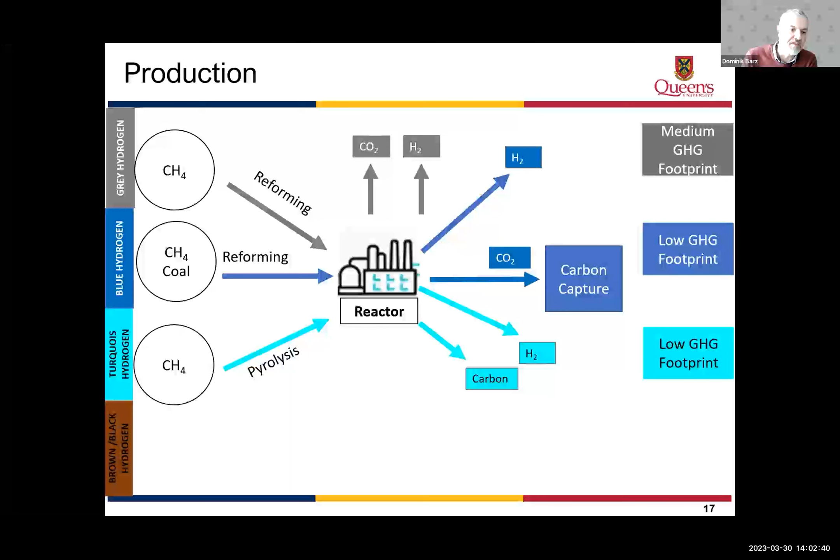And finally, we have brown and black hydrogen. Usually you distinguish between them, but it only is a difference in feed. So if you use brown coal, it's brown hydrogen. If it's black coal, it's black hydrogen. You do gasification, again, you get carbon dioxide and hydrogen, and you have the highest greenhouse gas footprint from all the processes that I have shown. And the brown is worse than the black.

So let's switch to storage. One of the problems of hydrogen is that it has such a low density, which means we need a high volume to store it, which is difficult. So we distinguish between physical-based and material-based storage mechanisms. Physical-based is that we compress the gas or we liquefy it. We do a liquefaction of the hydrogen. And we have, of course, a method where we do both, so cold and compressed.

And material-based, there's many different alternatives that we can use. We can adsorb it in MOFs, so metal organic frameworks. We can do hydrogenation in liquid organic material. We can dissolve it essentially in a metal. So we do a hydrogenation of metal, for example, lanthanum nickel 5 (LaNi5), which is a battery element. The nickel metal hydride battery works like this. It's stored in the interstitials of the metal frame. Or we can do chemical hydrogenations, for example, ammonia. And I will talk about that a little bit.

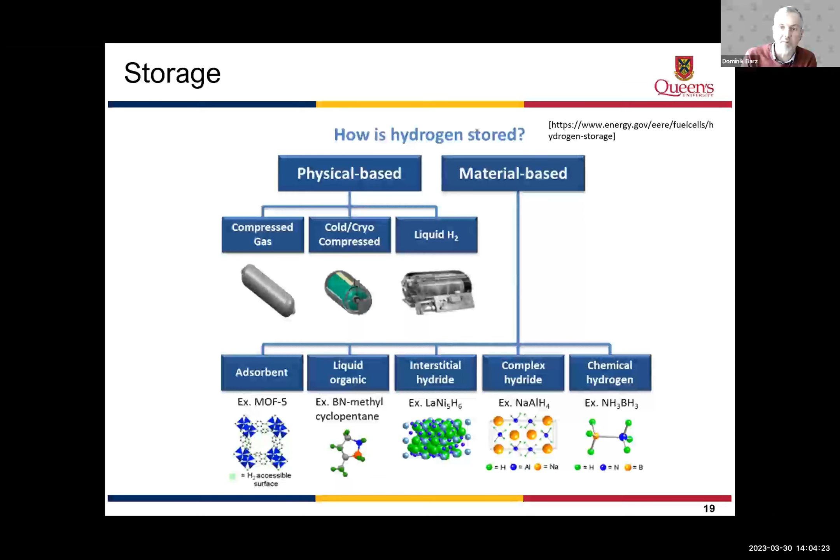If we go to high pressure, then we usually do that at ambient temperature, so 293 Kelvin. Then we pressurize the hydrogen up to 700 bars. We see that the volumetric density is less compared to the liquid hydrogen. That means the energy content is less. But this is usually used for fuel cell vehicles. And of course it's a challenge to have a tank which stands pressures up to 700 bar. So these are usually high-tech carbon composites.

And then, of course, you can use both. You can use cold and pressure, and then you get a higher energy storage density than the other two processes. However, we have to say here that this is tricky also. So if I do the compression of hydrogen to, I don't know, 350 to 700 bar, it takes around 10% of the energy which is stored in the hydrogen.

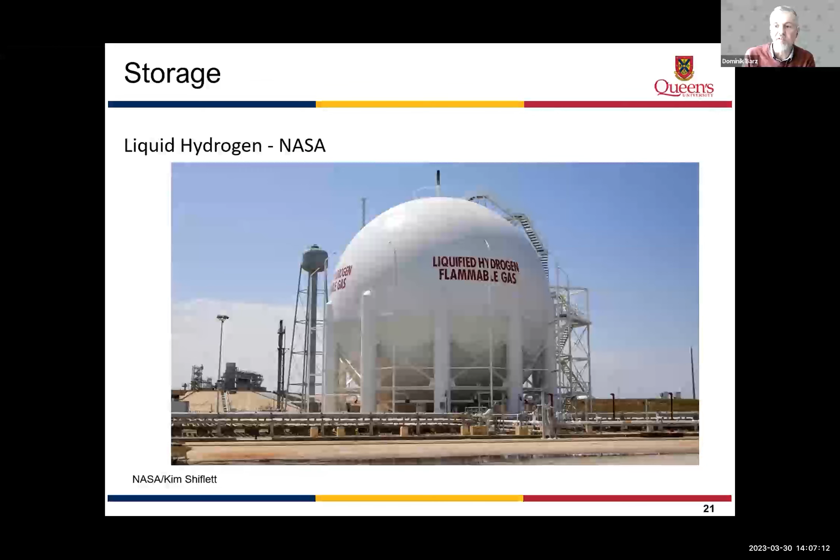Just a nice picture. NASA was the world's largest user of liquid hydrogen when they were operating the space shuttles. Of course, it's expired, but here we see a liquid hydrogen gas tank of NASA, which was used to fuel the rockets of the space shuttle program.

Another concept to store hydrogen is to put it into caverns and store it underground. And this compares to other large-scale energy storage systems, for example, pumped hydro facilities. I'm not sure whether you're familiar with that, but in Germany, it's fairly common. If the energy demand is low during the night, but of course you don't want to turn off your power plants, you use the electricity and pump water up a height, so maybe into a lake which is above a certain level.

And then during the day when you need energy back, you let the water flow down and it goes through turbines. And here, for example, we have the power plant in Geesthacht in Germany, which has a volume of 3 million cubic meters and a height difference of 83 meters. So the energy stored here is 534 megawatt hours.

There's also the idea to store compressed air underground. There's a plant in Huntorf in Germany as well. So you have a cavern which is 300,000 cubic meters. You pump the air into it, pressurize it up to 50, 70 bars, and then you decompress it if you need it and run it through turbines. And the energy storage is around 580 megawatt hours here.

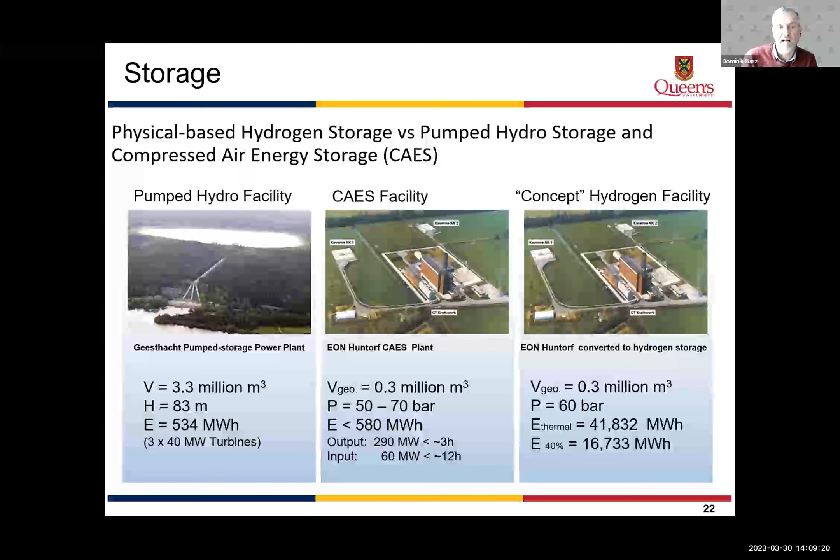You can do the same with hydrogen. So you pump hydrogen into the cavern up to, let's say, 60 bars. And this energy content is 40,000 megawatt hours in thermal energy. And if you assume you use a fuel cell and the efficiency is something like 40%, it's still 16,000 megawatt hours. So it's a much higher energy density in the same facility compared to compressed air.

Then we also have the opportunity to do hydrogenation. So we synthesize a chemical using hydrogen and another element, for example, ammonia. Ammonia production is a very well-established industry. There's a lot of nitrogen on Earth, so we don't have to worry about that. And it's fairly easy to release the hydrogen from the ammonia when we need it back. Also, the methods for the transportation of ammonia are well established, and they can be used for other things as well.

So if we have liquefied ammonia, it has 120 kilograms of hydrogen per cubic meter. And this happens at ambient pressure and minus 33 degrees Celsius. If you compare that to liquefied hydrogen, we need minus 253 degrees Celsius and 4 bar, and then it has only 70 kilograms of hydrogen per cubic meter. And if you compare it to compressed hydrogen at 700 bars and an ambient temperature of 20 degrees Celsius, it only has 42 kilograms of hydrogen. So this might be a valuable approach to store and distribute hydrogen.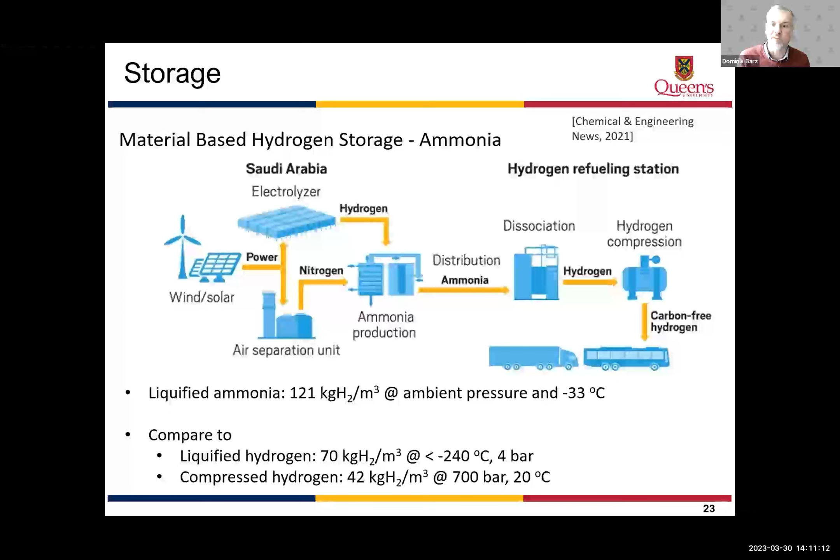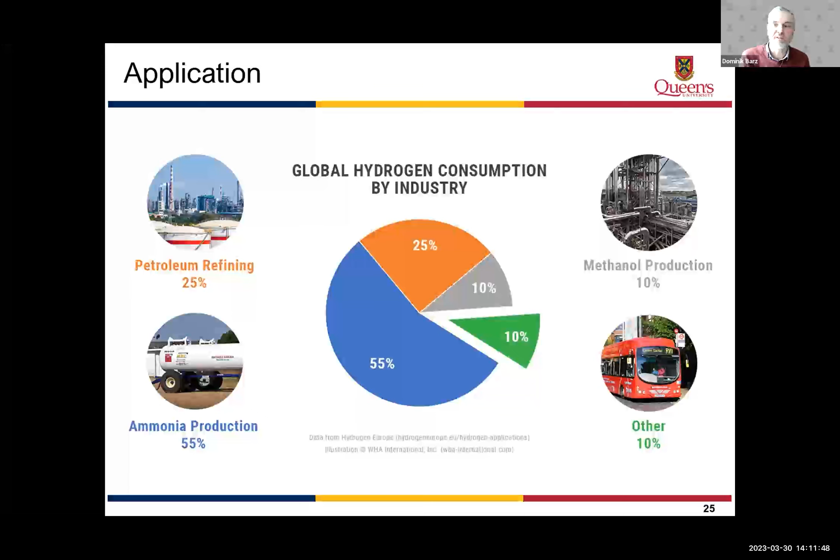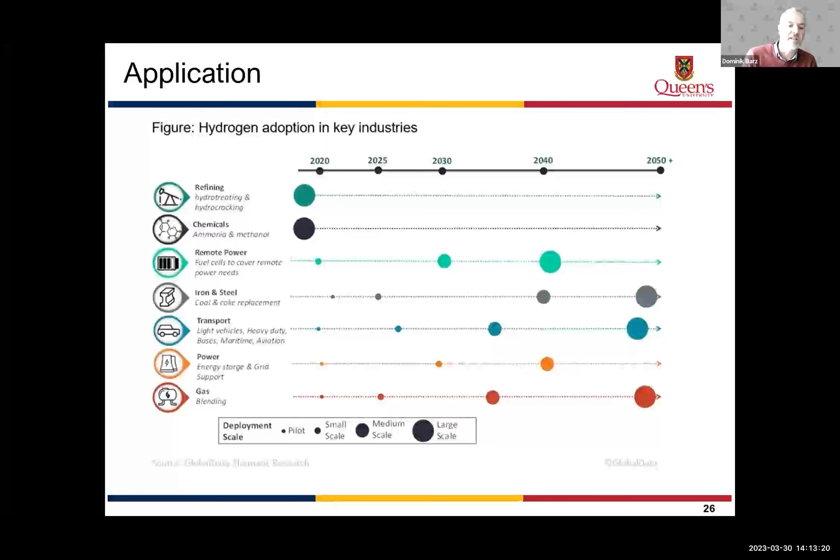As a power fuel, so energy storage and grid support, these people predicted it will never be used. And this has certain reasons; I will talk about that on the next slide. And blending of gas, so substituting natural gas with hydrogen, will also catch up by 2050. It will be a large-scale industrial process. So why wouldn't we use hydrogen as an energy carrier?

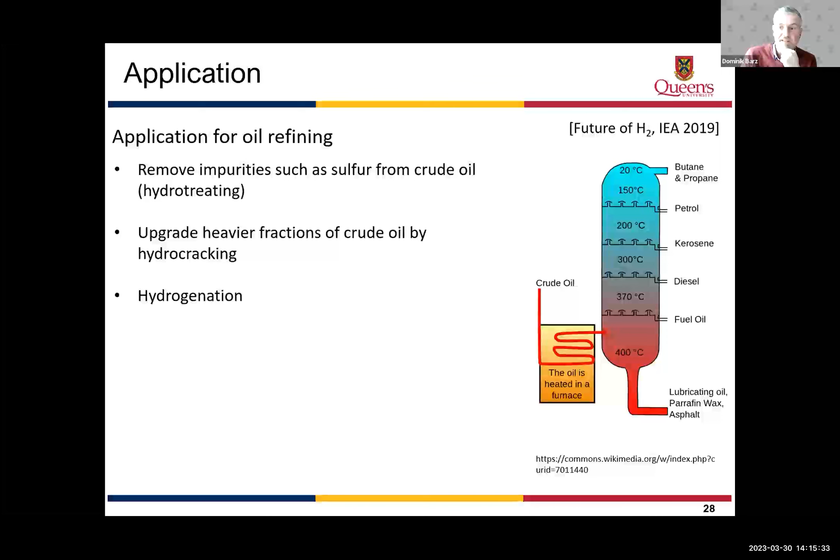What is used nowadays is the application in oil refining. There are different things we do with hydrogen. We remove sulfur from crude oil, and we upgrade the heavier fractions of the crude oil. We do hydrogenation, and this is also applied to a smaller extent to oil sands and biofuels. Oil sands, that's a Canadian thing.

There is the expectation of a 7% higher hydrogen demand by 2030. This is boosted by tighter pollutant regulation, so we need lighter oil. But the growth of oil demand is expected to be moderated, and therefore the long-term demand highly depends on the future of oil. Here we have to say that 65% of the hydrogen that we need in refining is met by hydrogen supplied as a byproduct from crackers or catalytic reformers. So it's not very likely that we replace it by low-carbon hydrogen made by electrolysis or something like that.

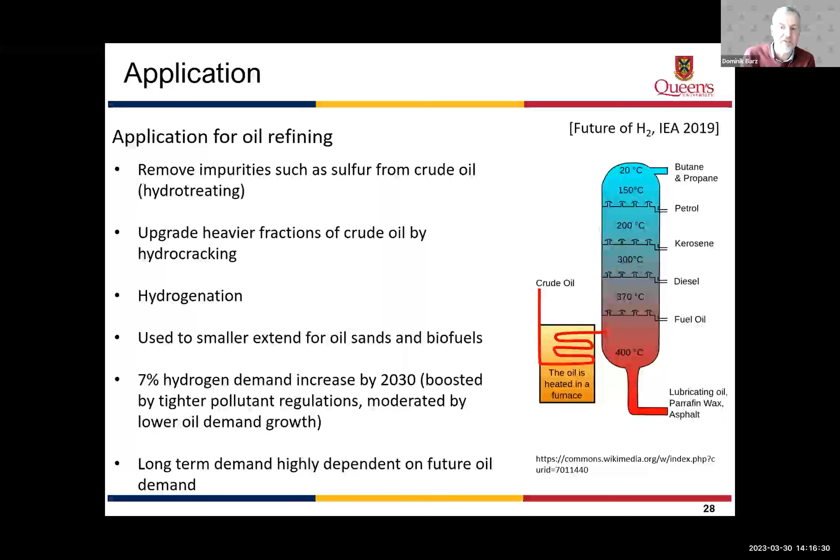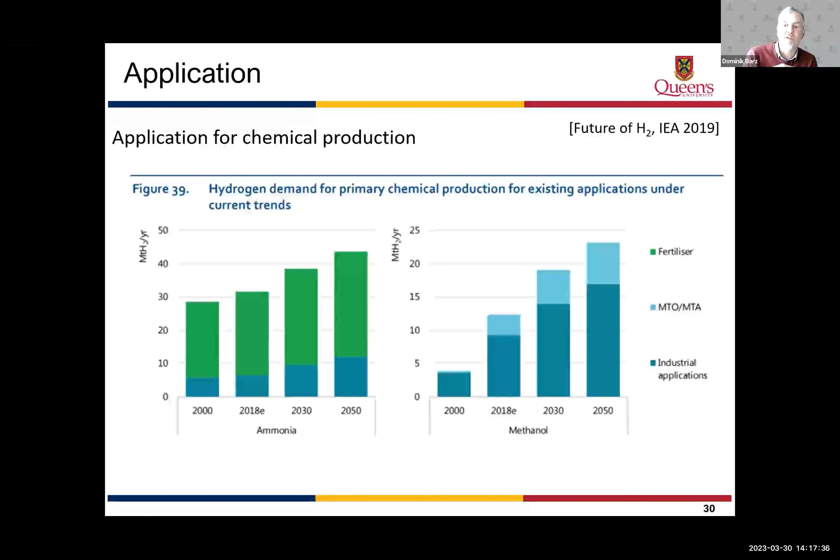For methanol, the increase is much higher. We had not even 5 megatons of hydrogen demand per year in 2000, but in 2050 it's expected to be almost 25. This mainly goes into fuels and additives and processes where we need methanol as a precursor, for example for olefins or aromatics.

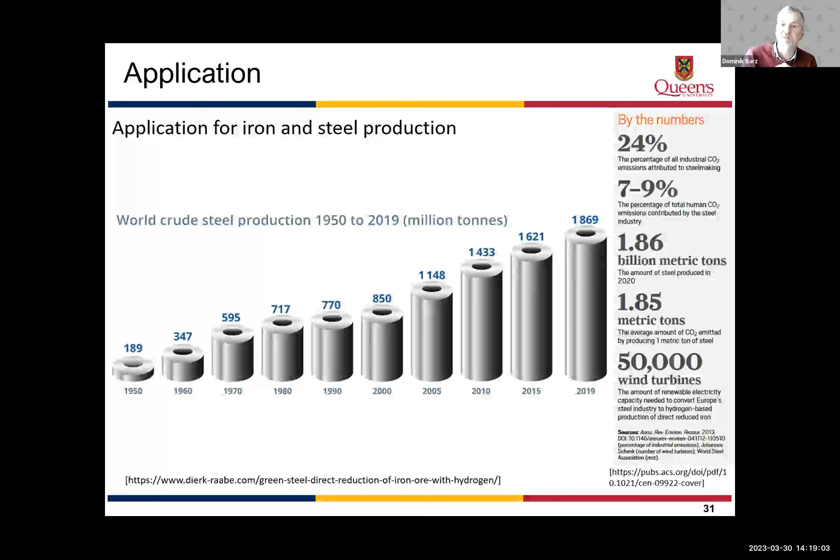And that's the dilemma of the iron and steel industry. It is expected that the output of crude steel and pig iron goes up by plus 41% up to 2050. But in the Paris Agreement, we said we would like to keep the 2 degrees Celsius target, and that means that the emission intensity of the iron and steel industry must be lowered by 2/3 of its present values.

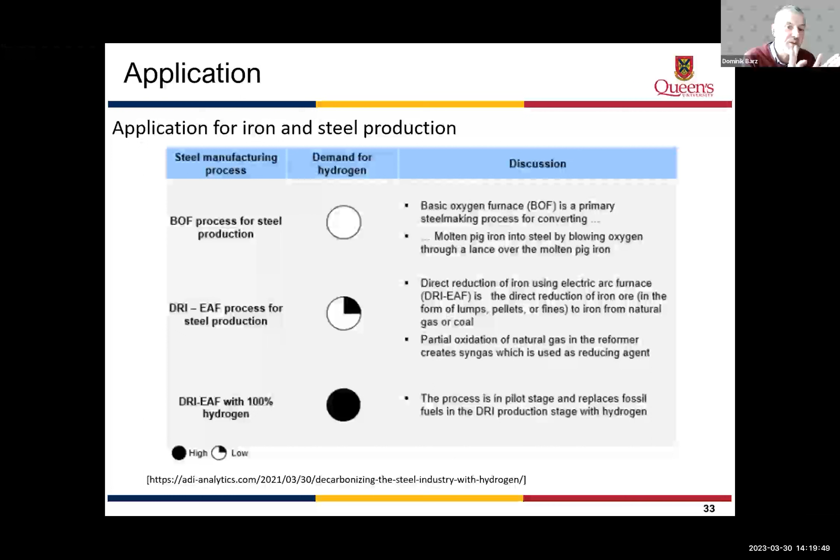We all know there are different processes for making iron and steel, and I don't want to talk about that because it was just covered. So maybe I'll just switch to the emissions. If we keep our traditional blast furnace and basic oxygen furnace, we emit around 2 tons of carbon dioxide per metric ton of steel produced. If we go to direct reduction, where we have the syngas and the electric arc furnace, we cut it down to around 25% of that value.

But if we further use dedicated hydrogen made from somewhere else and not from the syngas, with the electric arc furnace, we cut it down to 10%, essentially. There's also an electrolytic reduction process, but I'm not sure how relevant it is. But maybe you can tell.

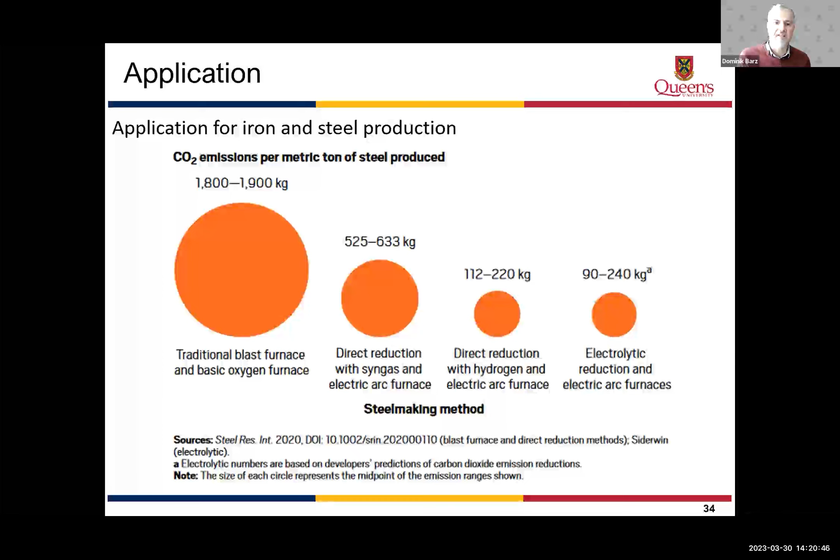So just to summarize my talk, hydrogen has added benefits of meeting the industrial demand and also helping with the decarbonizing of the processes. The cost of green hydrogen produced by electrolysis nowadays is still significantly greater than blue hydrogen produced by steam methane reforming with carbon capture. And that, of course, is a major hurdle to implementing electrolyzer technology.

In terms of hydrogen as fuel in transportation and energy storage from renewables, I would say the future is unwritten. Everything is possible: that we drive around with fuel cell cars in 50 years instead of battery cars, or that we have a mixture, maybe the trucks are mainly powered by hydrogen and fuel cells. But again, the crystal balls usually don't work that well. That's at least my experience.